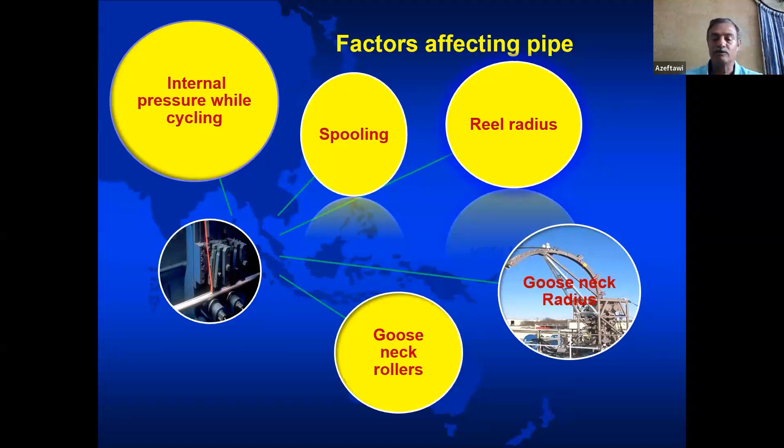In the presentation slides you have, the biggest circle I made is the internal pressure cycling, because this circle combines two main killers: the internal pressure and the bending stress. We talked about spooling, it's a bending stress. We talked about reel radius, which is a bending stress. We talked about the gooseneck radius, which is a bending stress. We talked about the gooseneck rollers.

Then we have these slides, still talking about pipe life. We talked about the rig up alignment. We talked about corrosive fluids. We talked about axial stress. We talked about the traction pressure.

I will just remind you of the traction pressure. This is your pipe that you are running in the hole. Then you have the injector, which holds and injects the pipe in the well and out of the well as well. So these chains grip on the pipe, and if this pressure you have on the pipe is too much, this reduces the pipe life.

Even if it is less than required, it will damage it. Whether it is too much or too little, both will affect the pipe, because if it is too much, this will cause fatigue to the pipe with the extra stress and extra force you have on it. And if it is less, the pipe will start slipping due to its weight inside the well, or the pipe will start to eject out of the well due to the pressure pushing it out. This will create friction between the pipe and the gripper block of the chain that will cause damage to the pipe itself. So the traction pressure is an important factor.

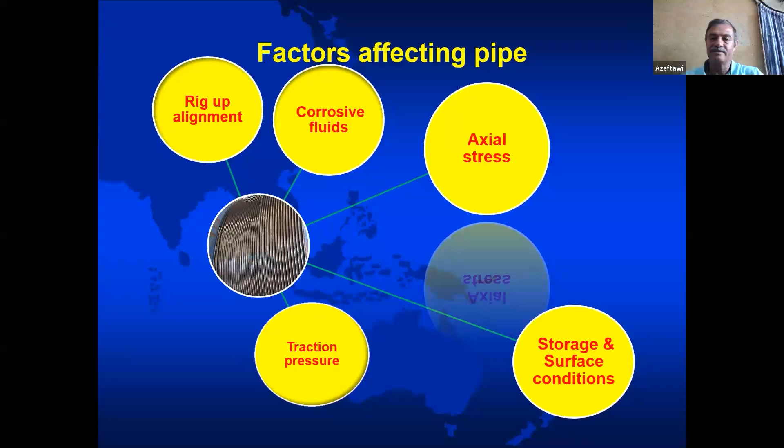and someone else who protects his pipe against all these conditions. Just very simply, have a paint brush with heavy oil, like gear oil, for example, and paint all around the pipe with this oil to make a very thin layer that protects the pipe outside diameter from the surroundings. And someone who is more advanced, who cares more about the pipe, covers it with a tarpaulin to protect it. Of course, this affects the pipe life.

Today let us continue about the factors affecting the pipe life. One of them is the injector gripper block. What you see here in this picture is the chain, and these are the gripper blocks. This profile you see on the gripper block represents the pipe.

So this gripper block, for example, if it is designed to withstand or hold a 2-inch pipe, this profile is made to accommodate 2-inch pipe. If you change the pipe size, you have to change your gripper block to match the new pipe size. So if an injector gripper block does not match the size—for example, you are using a gripper block for 1.5-inch pipe but using a 2-inch coiled tubing pipe—you will damage your pipe; it will collapse.

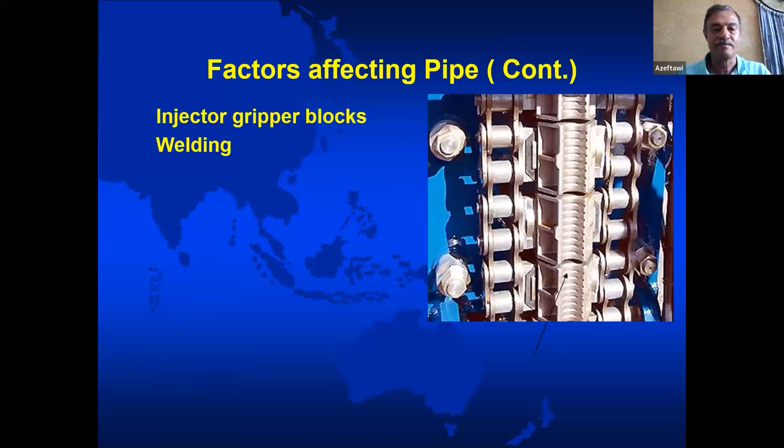Or even if it is the right size, but the gripper block is rusty or one of its teeth is broken, this will definitely affect your pipe life. The welding: the pipe, if for example you got 15,000 feet of pipe from the factory, this pipe comes without any welding.

I wonder if you can see what's inside the pipe or not. But look at my finger here. You see a seam weld here. There is a seam weld here. I wonder if you can see it. I think you can see it now. This is what we call a seam weld.

This is a longitudinal weld, because to manufacture 15,000 feet of pipe, in the past, last century, we used to get strips from the factory. These strips were maybe 2,500 feet. Then we start making it into a pipe. It passes through rollers to make a pipe 2,500 feet long. But you need 15,000 feet, so I have to weld another 2,500, and another. Each weld we do, we call it a butt weld.

The butt weld is a very weak weld, because when you weld two pipes together like that, this area between the two pipes, around the weld, you cause what we call a heat affected zone. In this heat affected zone, the cross-sectional area of the pipe is weakened. And it is true that in the last century, when pulling out of the hole, when this butt weld came across the gooseneck, it would break, because this is a weak point. It does not resist the bending stress, the cycle of straight to bend, does not resist this. That's why, starting from the 80s of last century,

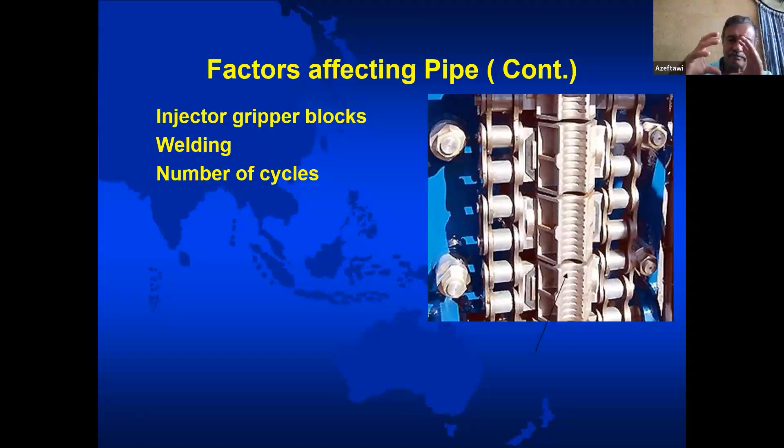Number of cycles. Because as you keep running in hole, pulling out, running in hole, pulling out, passing through the gooseneck, the reel bends and straightens it, then it goes to the gooseneck and bends it again, then it goes to the injector and straightens it. This cycle of straight and bend affects the pipe life dramatically, yes.

The overpull. Because overpull means when you are running in the hole and you get stuck. To get free of the stuck condition, one way is to apply overpull. This overpull you apply is extra axial stress. This extra axial stress affects the tensile strength of the pipe. If the pipe tensile strength is affected, all the mechanical properties of the pipe are affected.

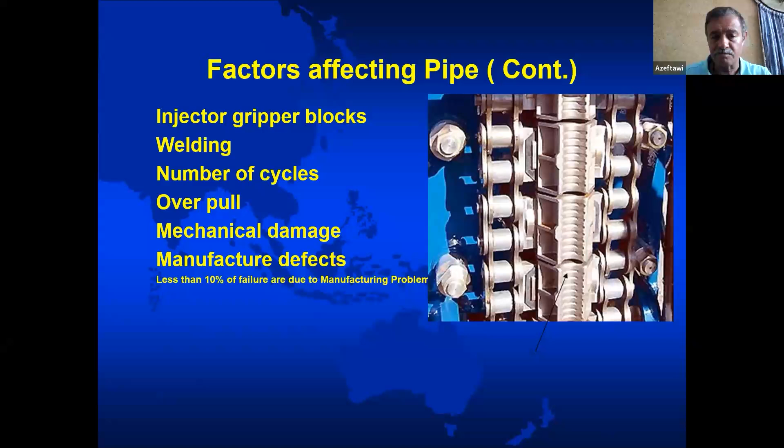Mechanical damage, which is actually the manufacturer's defect. As you see here, less than 10% of failures are due to manufacturer problems. Then comes something really, really dangerous, which I put aside, it is the ovality.

When you buy a pipe from the manufacturer, this is part of a pipe, right? The factory gave you also with this pipe the technical data sheet. This technical data sheet you receive is only valid before you make the first run in hole. Please don't treat it seriously, I mean the technical data sheet.

Because forget it, it is not the same. Once the pipe is out, this pipe you received out of the hole, it is not the pipe you ran the first time. Why am I saying this? The technical data sheet you received from the manufacturer is based on the fact that the pipe you received has one diameter. So if you measure it anywhere, if this is 1.5 inch, it will give you 1.5 inch anywhere you measure. But after you make the first run, the pipe is not round.

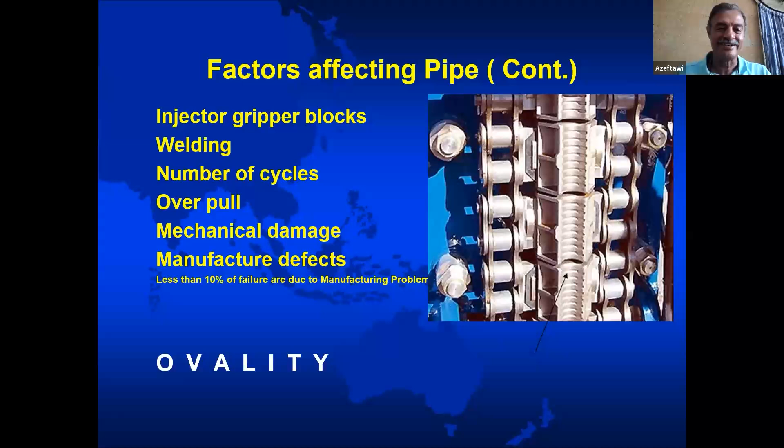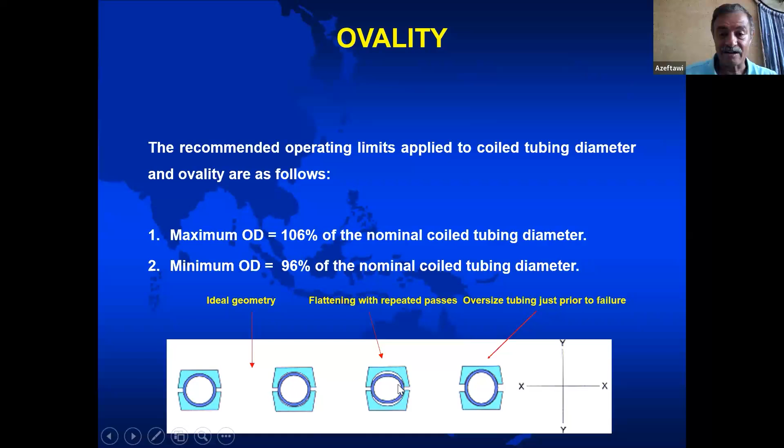Without going into details here, this is the pipe, this is round here. These are the gripper blocks that bite or that grab on the pipe. But look here, the ovality starts to be clear here.

I might go quickly here. When we are running in the hole, if the well is vertical, we have no problem. But if the well is highly deviated, or if we start getting into the horizontal section deep in the well, a lot of considerations has to be taken to tell us how deep we can go into the horizontal section.

Otherwise, when you start going into the horizontal section, now you are pushing the pipe. It is not a weight now, the pipe or the injecting force, but you have to have extra force to push it into the horizontal section. If you have this force to push it, and if the pipe is not pushed, then you will start to have this buckling. And this buckling might increase to a limit that you will be completely stopped.

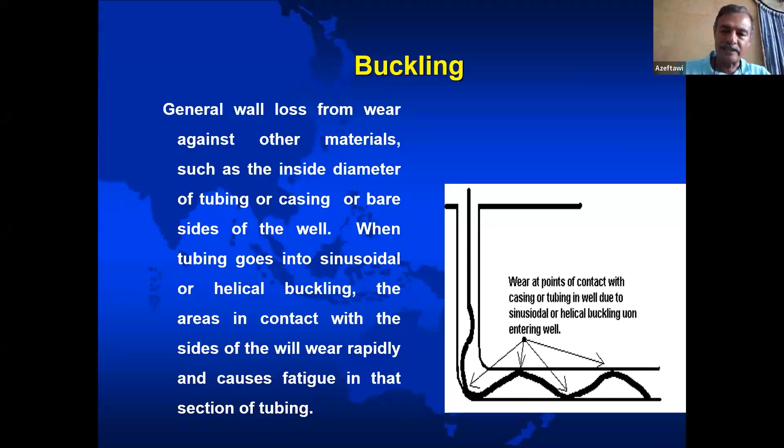Again, without going into details, for this pipe to be pushed into the horizontal section, you need a lot of things to think about and to calculate. But when we talk about the pipe itself, I care about two main things actually: the OD and the thickness. Because the OD and thickness will give me the rigidity, which is what I need to push the pipe into the horizontal section.

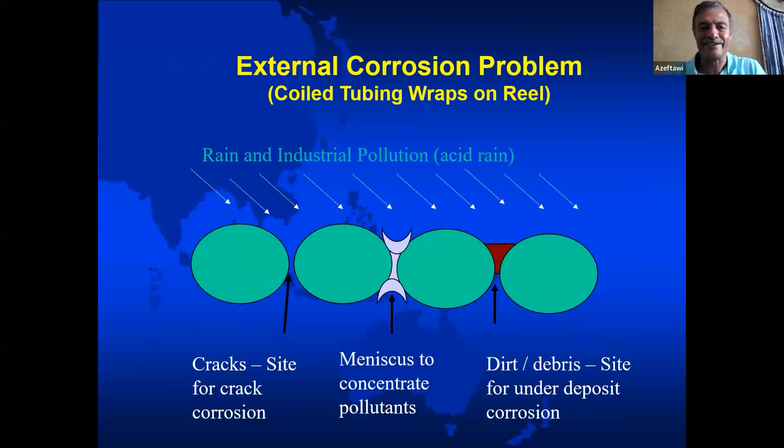We discuss all this in a course of 5 days. Each day is eight hours to talk about coiled tubing only. That's why I cannot talk about this stuff here in a 1 hour session.

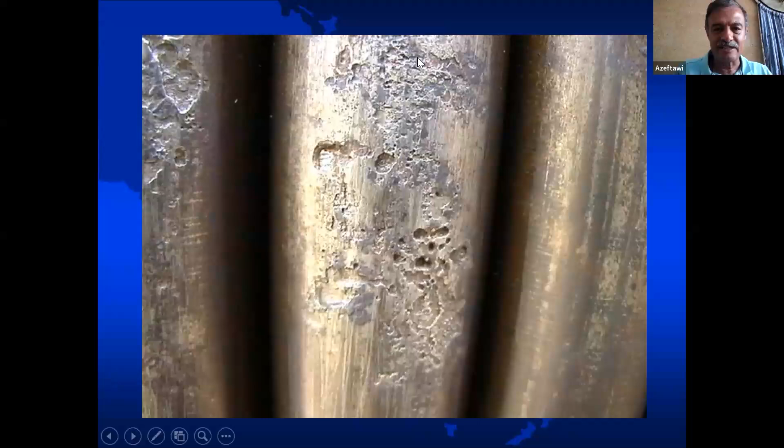You see this damage. This is due to external conditions. H2S, for example.

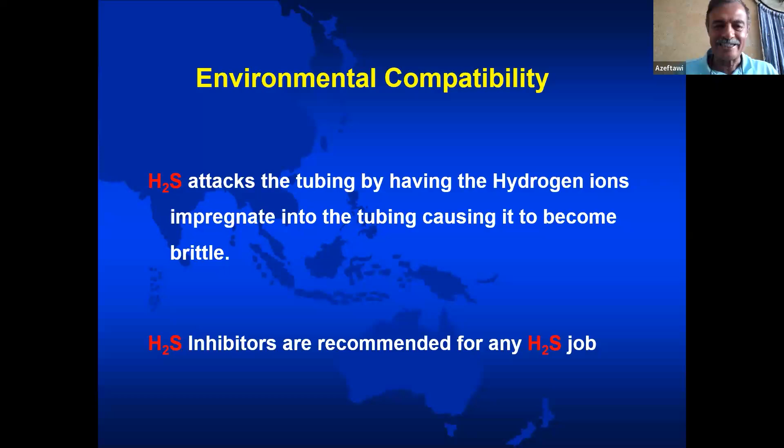H2S - if you work in an H2S environment, that means that all your equipment should be H2S resistant. And I need you to know that if I tell you this pipe is H2S resistant, do not ever think that if you submerge it in a bottle filled with H2S and you keep it there for a month, you will come back and still see the pipe. Of course not. It is H2S resistant up to a limit. You should not exceed it. Otherwise it will not resist. But again, this is a big subject not to talk about here.

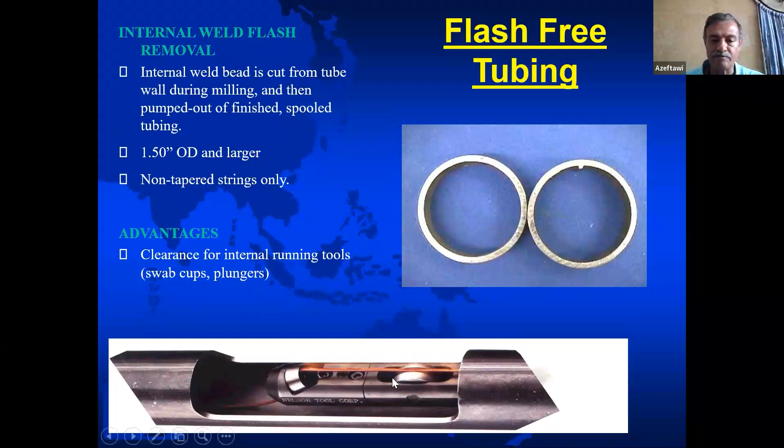See, this is the seam weld I told you about. When we weld the pipe, this longitudinal weld, the seam weld, we call it the flash. This is extra material that we need to remove. The only way to remove it is with this type of pig that we run internally to remove this flash, because it is a weak point.

I need you to know that the coiled tubing is not made of one material. It is made of an alloy between 8 and maybe 12, 13 different materials. It depends on the application. And why do we have it as an alloy? Because we need different advantages that we cannot find in one metal. So we take the advantage from that one, and the advantage from the second one, from the third one. But of course, any advantage you take,

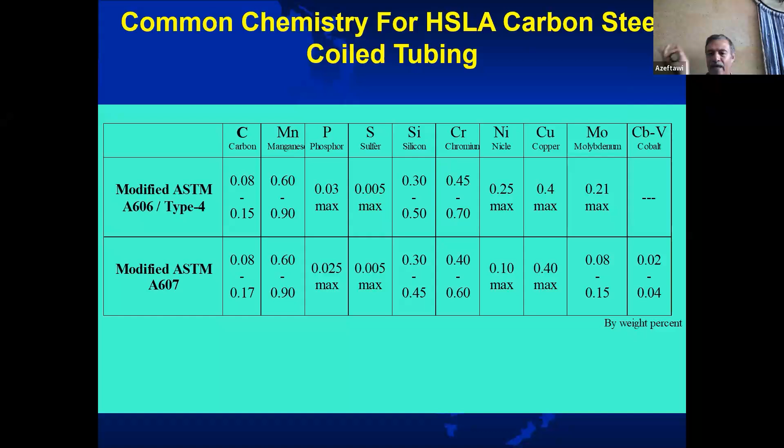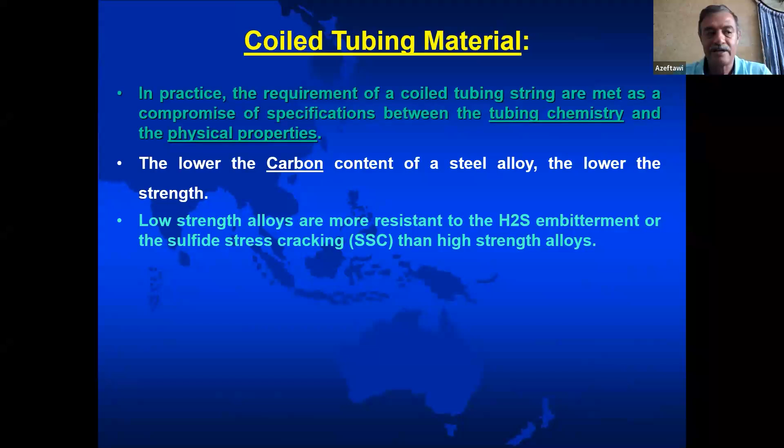you cannot take it alone. You take it with the disadvantage of that metal. That's why, for example, the lower the carbon content of a steel, the lower the strength of the pipe. But the low strength alloys are more resistant to H2S. So you remove the carbon content, you increase the resistance to H2S, but you lose the strength. So it is a combination. You have to know what do you really need.

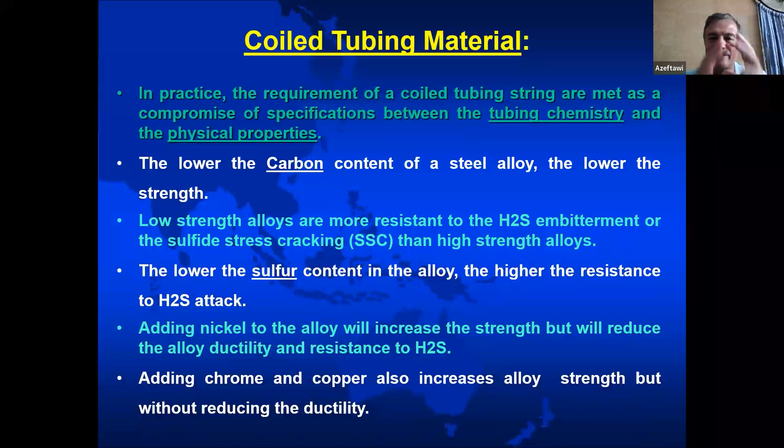The lower the sulfur content in the alloy, for example, the higher the resistance to H2S attack. But adding nickel to the alloy will increase the strength, but will reduce the alloy ductility and resistance to H2S. So you have an advantage, but again, you take it with a disadvantage. So it is quite hard to make this combination that fits the job you need.

I believe everyone of us knows this relation, the stress-strain relation. So I will just skip it.

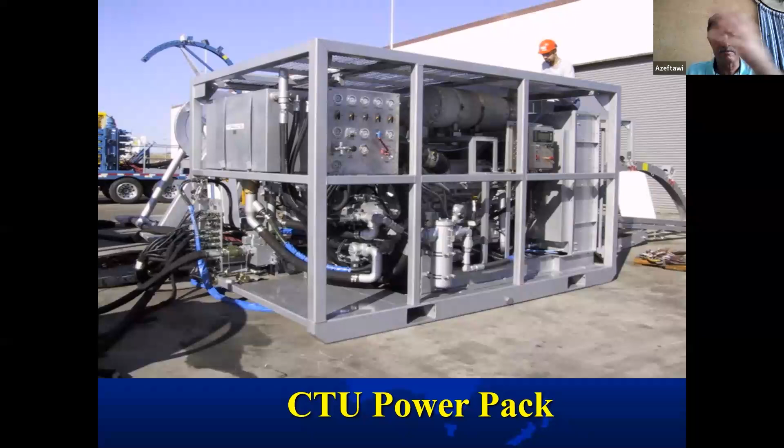If I look at the other side of this power pack to see what the picture looks like, you will see these cylinders. We call these cylinders accumulators. What's the accumulator? It is a steel cylinder like you see. What's inside it?

Inside it, there is a rubber bladder on the top side, where we fill it with pressurized nitrogen at 1500 psi. The rest of the cylinder is hydraulic oil at 1500 psi.

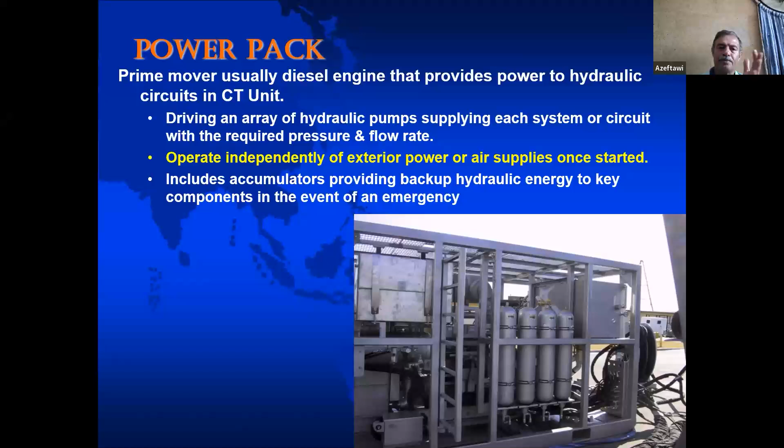If during the job the power pack failed, now you are in a problem, right? Because you lost the power, and accordingly you lost the control. So you might have a disaster, you might have a blowout. That's why we have this backup. If you lost the power pack, as long as it runs, it feeds this accumulator hydraulic oil, which is inside with 1500 psi.

The moment the power pack fails, the pressure will drop. If the pressure drops, the nitrogen, which is at 1500 psi, will expand. It's gas, because the nitrogen is 1500 but the hydraulic oil is less. So pressure will start going from higher to lower, and this bladder will expand, pushing the hydraulic oil into the desired hydraulic hoses required to give you pressure.

This allows you to operate your pressure control equipment, so you can open and close your BOP to secure the well. You can increase the pressure to the injector to keep gripping on the pipe. Because if you are supplying these chains with 1000 psi, for example, and the pressure drops, then the pipe might go into the well under its own weight, because its weight will be greater than the pressure you apply. Or, as we said before, the well pressure might push this up, because the well pressure will be greater than the pressure of the chain at that time.

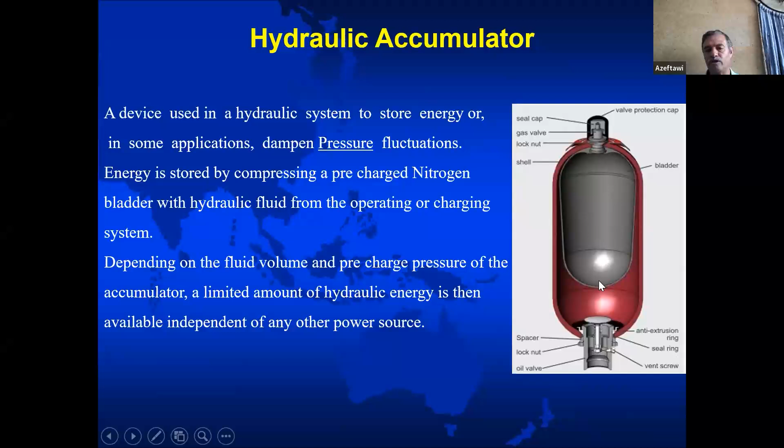So it is a storage of energy. These accumulators store energy to save your life in case of emergency, if you lose the hydraulic power. As I said, this is a picture of the accumulator. This black part is the bladder. Inside it is pressurized nitrogen gas that expands to fill the majority of the accumulator, pushing the hydraulic oil to the required hoses.

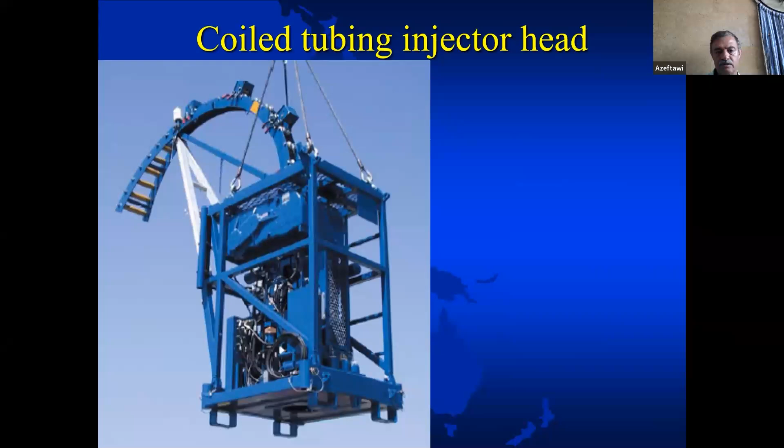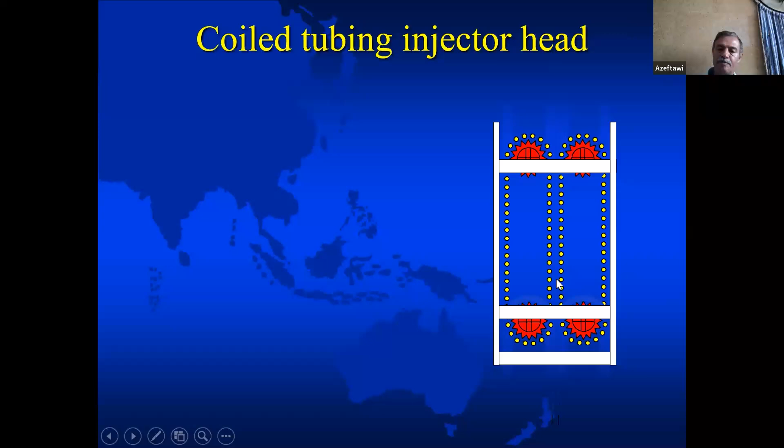These dotted yellow strips are the injector chains, where the pipe goes inside, between them, where we apply pressure. We apply pressure through these traction pressure pistons and cylinders, which are attached to these steel skates. So we push these skates to push the injector chain to grip on the pipe. This is what we call the traction pressure.

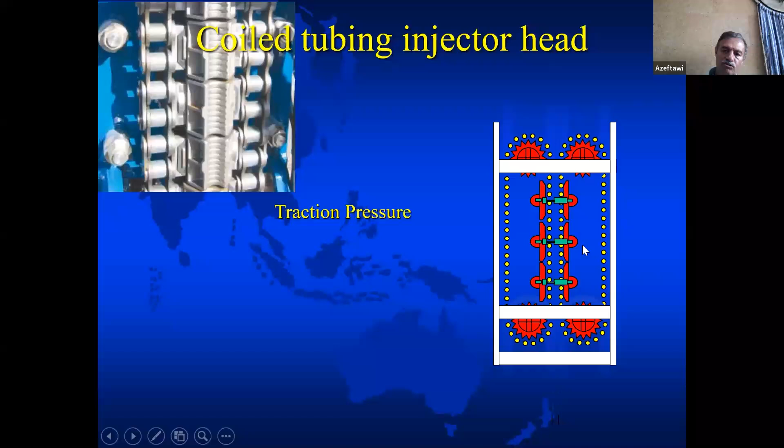And if you look at the other side, these chains here, we cannot leave this long distance uncontrolled, otherwise it will be loose and might buckle. So what we have there is the outside chain tension. We always keep 300 psi on this outside chain tension so these chains are not buckled. This pressure applied to the outside chain tension has nothing to do with the pipe itself, but is for the chain to avoid buckling.

Here is our pipe, and let's start now running in the hole. We are running in the hole now. These chains are pushing the pipe down, controlled by constantly grabbing on the pipe. If we need to pull out of the hole, all we have to do is change the cycle. The inside becomes outside, the outside becomes inside, and now we are pulling out of the hole.

Let us put everything back. This is our injector. And below here, as I told you, what's attached to the bottom is the stuffing box, which is our primary valve.

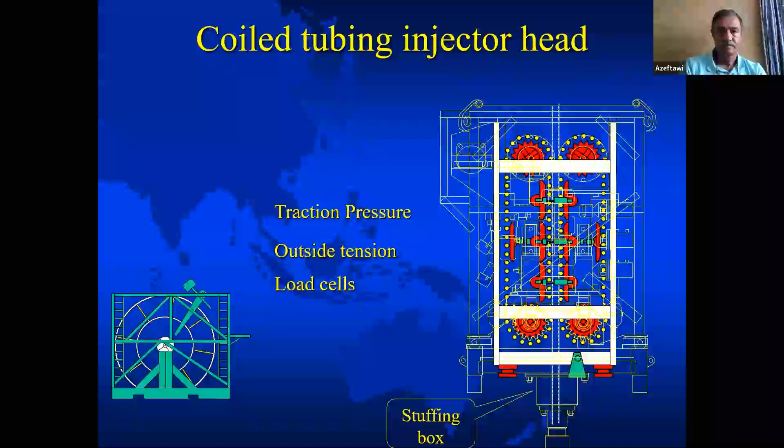This is a cross-sectional area of the injector. We cut here to see what's inside. This is the driver sprocket, this is the idle sprocket. These green parts are the skates, which are attached to the piston and cylinders where we apply the traction pressure to grip on the pipe. And you see the pipe, the white pipe here. And this yellow sprocket is where we apply the chain tension, the outside chain tension, to keep this distance from being buckled.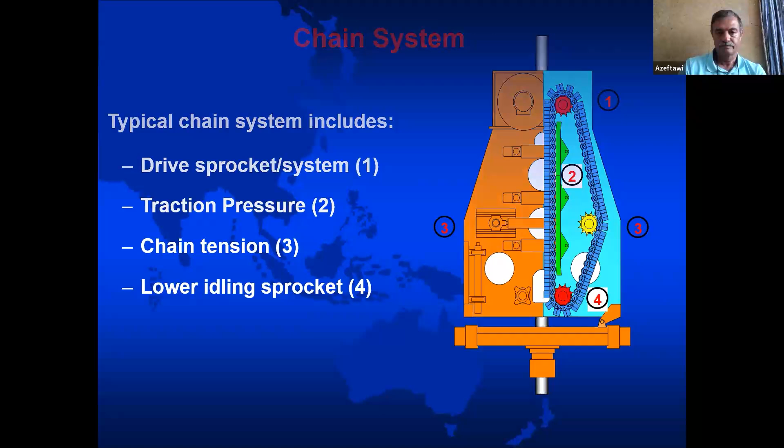Now we are running in the hole, and this is another picture of what we have here. These are piston and cylinder, where we control it from the control cabin. When we apply pressure this side, this is to grip on the pipe.

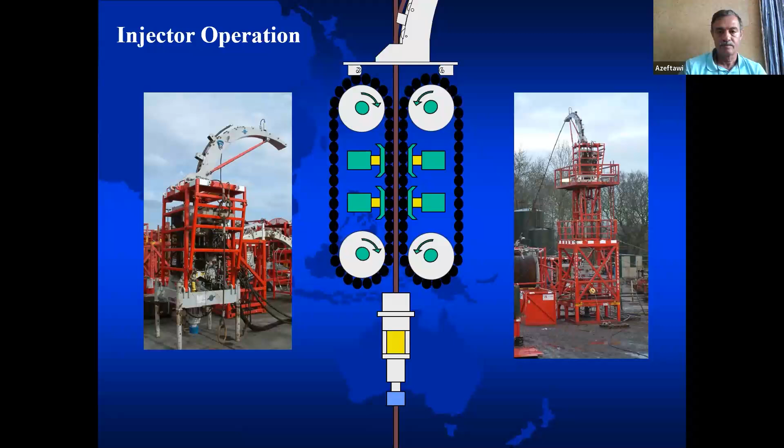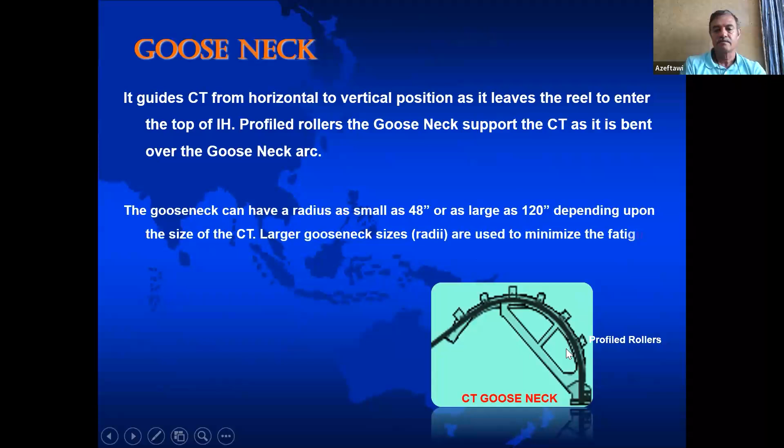This is the gooseneck. If you remember, we said when we increase the pipe size, we have to increase the gooseneck radius to minimize the bending stress. What you will see now are different sizes of gooseneck. The bigger size is for bigger diameter, the smaller size is for smaller diameter.

This is our injector, this is our gooseneck, and this is our primary barrier, which is the stuffing box. These are the hydraulic hoses, which are connected to the control cabin, where I can control the movement of the injector, whether I'm running in the hole, pulling out of the hole, increasing the pressure on the skates, or decreasing the pressure.

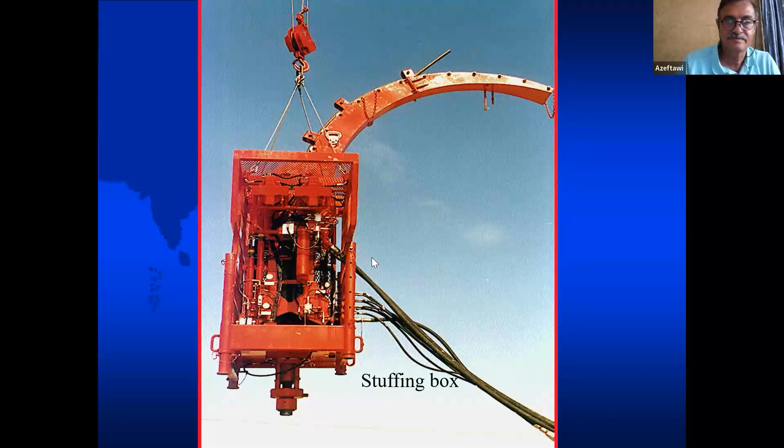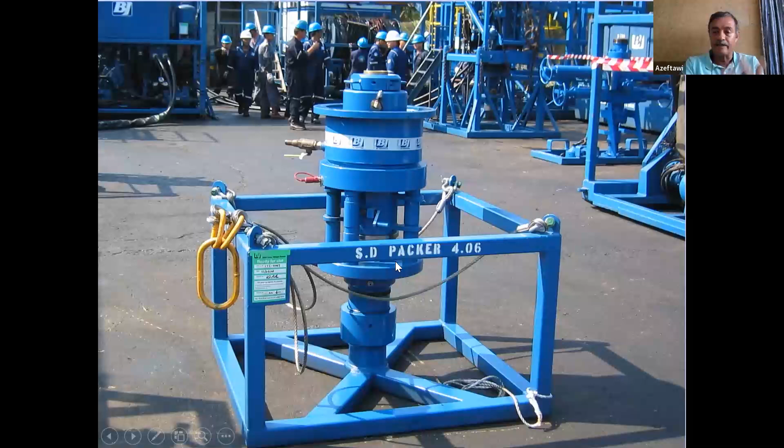This is the stuffing box. If you look what's written here in white, SD Packer 4.06. This means this is a side door packer, a side door stuffing box, side door element. And 406 is the size of this stuffing box, 4 1/16 of an inch. We call it side door because of this door on the side, where inside it is the element, the rubber element that seals around the pipe.

So if you need to change this element during the job because it is damaged, you can easily do that by opening this side door, taking the bad element out, putting the new element, closing the door, closing the lock, and applying pressure. In 5 minutes, you change the rubber element.

This is our primary barrier. It works by pressure. These are made of polymers. It is self-lubricating, so you don't have to apply any grease or oil while running in the hole or pulling out of the hole, because these are self-lubricant.

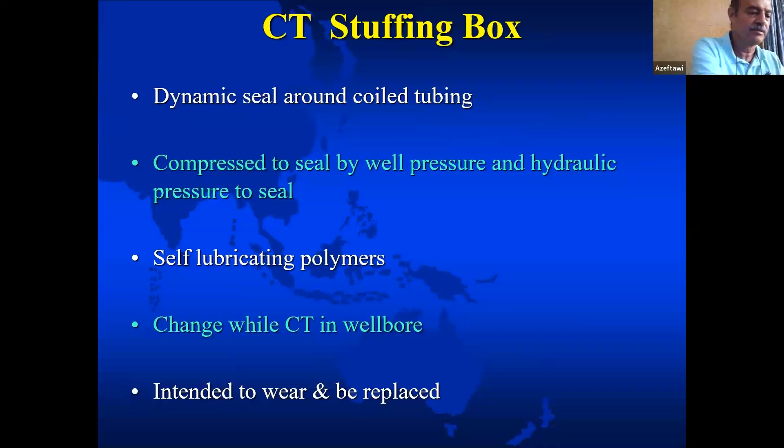From time to time, of course, it leaks, because there is friction between the pipe and the polymers. So it leaks, but then from the control cabin, you can apply pressure to seal again.

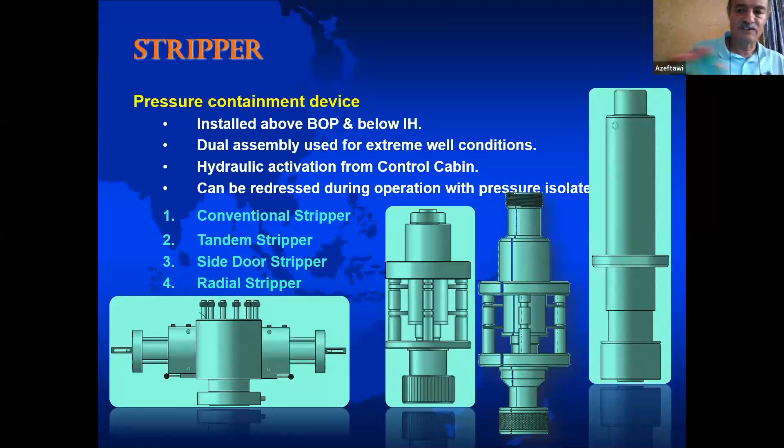I have seen people in the field during the job, if the stripper, these polymers, leak, they increase the pressure. But the way they increase the pressure is really funny. People don't realize that all you need is to apply 10 psi, 15 psi, and this is sufficient to make the seal again. But people just, whatever they get, 100 or 500, they don't care. This is really bad, because the extra pressure you apply causes extra friction between this polymer and the seal, so you are damaging your sealing surface rapidly.

The size of this stripper depends on the bore. We have different sizes, dressed for a specific size of coil tubing, of course. It is hydraulic, it works by hydraulic, and we have 5,000, 10,000, 15,000 psi, depending on your requirement. Some of them are H2S resistant. This is a specific requirement you have to mention, because this is extra money.

Now we have different materials. Normally, people, when they go to the job, they just grab this from the store and go. Normally, what we have in the store is the cheapest one. If you're looking for a can of sugar, then you go to the supermarket. Many people select the cheapest, as long as it is the same size and it looks white. So you select it. If you have one pack at $1 and one pack at $0.75, of course you will go for the $0.75.

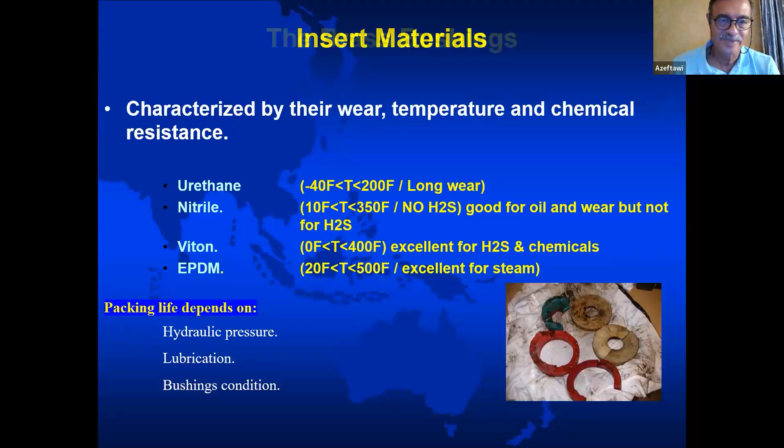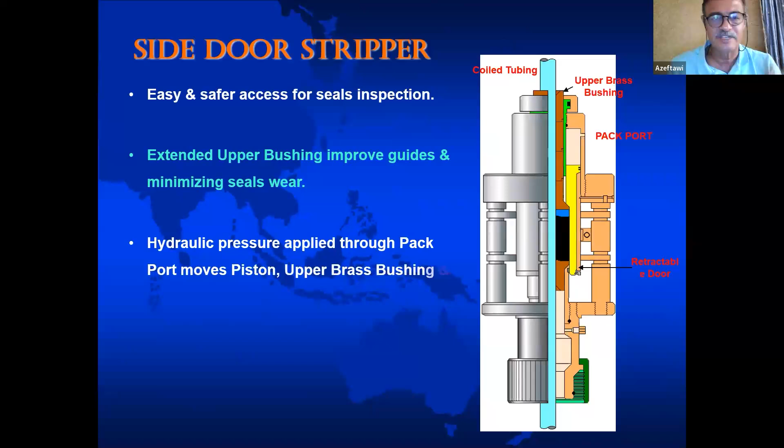I cannot go to, I will skip these pictures because of the nature of this course.

This is our control cabin. This is how it looks inside, from inside. This is what you're going to see. You have controls - you can control everything in the unit. You can control the power pack, your BOPs, your injectors, everything from these knobs here.

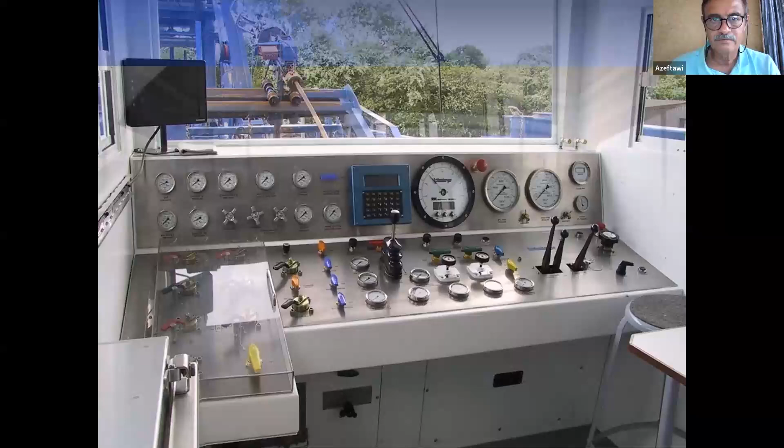I always prefer this type of control cabin or control house, because you see the whole view, so you can see all around you. We have some of these now. All the controls are on your seat - when you are sitting there, everything is on the side of the seats.

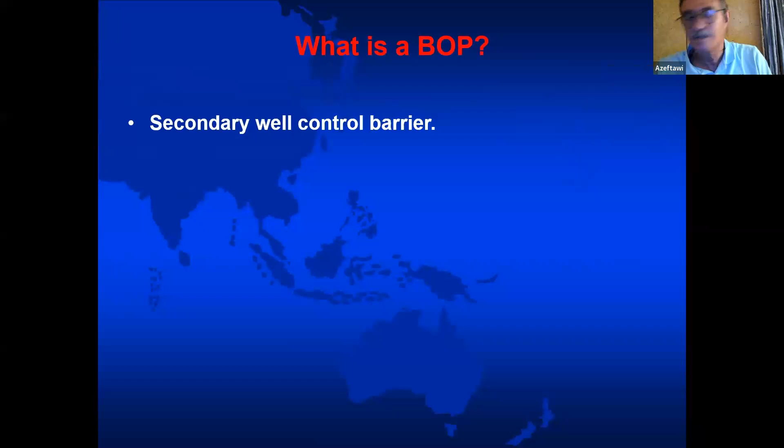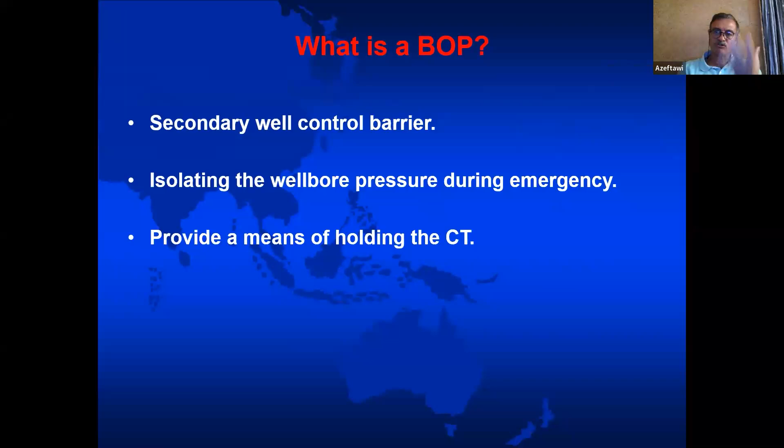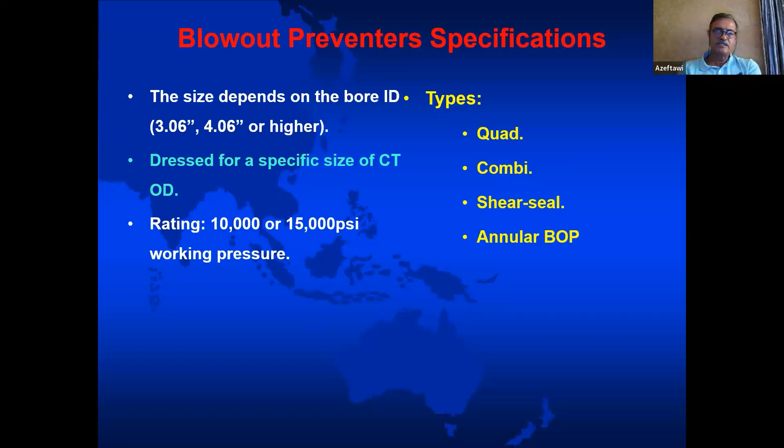Then we have our secondary barrier, which is the BOP, blowout preventer. This is our secondary barrier control, isolating the well pressure during emergency. It provides means of holding the coiled tubing. It can hold the whole weight of the pipe. Different types of BOP we have, different sizes, different pressure ratings, different ODs. We have standard service, we have H2S service.

I think I skipped something, just a minute.

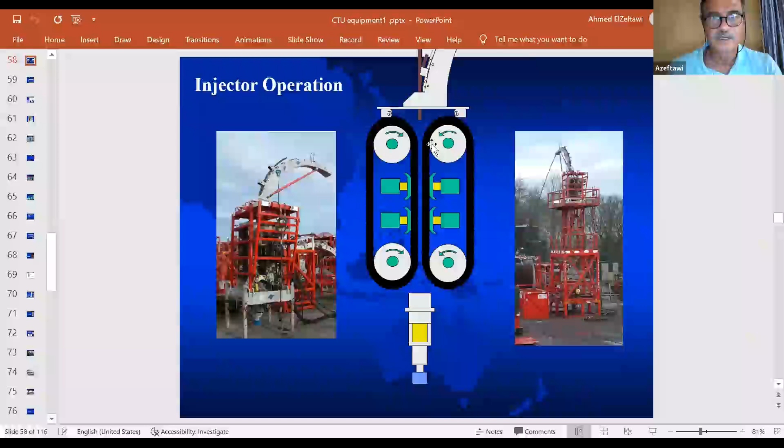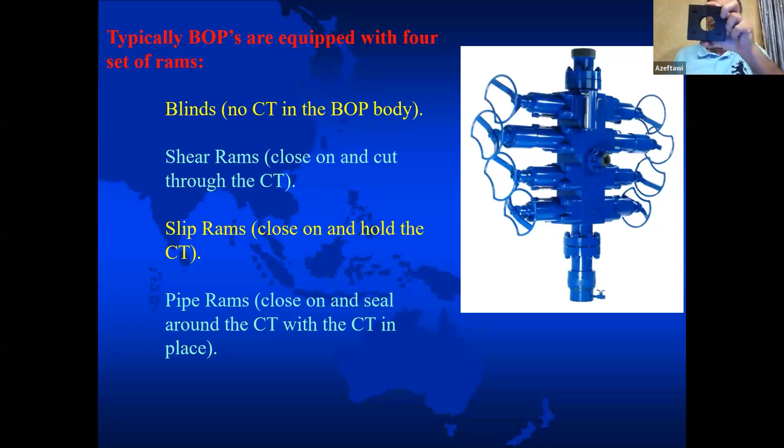The last one is the pipe ram. This is the pipe ram, and this is the pipe, the inner insert. I will drag it here. I have 2 of them. So when I close - this is the second one - when I close, it will seal around the pipe here. This is the pipe ram, which is the last one.

I'm looking for the question, please.

Please tell again why there are teeth in the slip ram. Teeth are required to hold this pipe. If there is no teeth here, it will be very smooth, there is no friction, so there is no gripping. But by having this teeth, it will bite on the pipe and grip on it correctly.

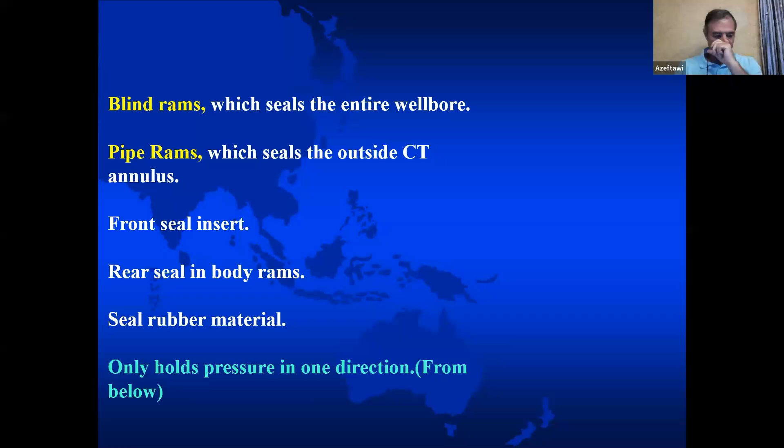Before looking at the question, I was telling you that if you go to the rig floor to see the slips, which we normally use while running completion or drill pipe to hold the weight of the pipe, you'll see the teeth of the slips on the rig floor are facing upward. It faces upward so it will resist the weight.

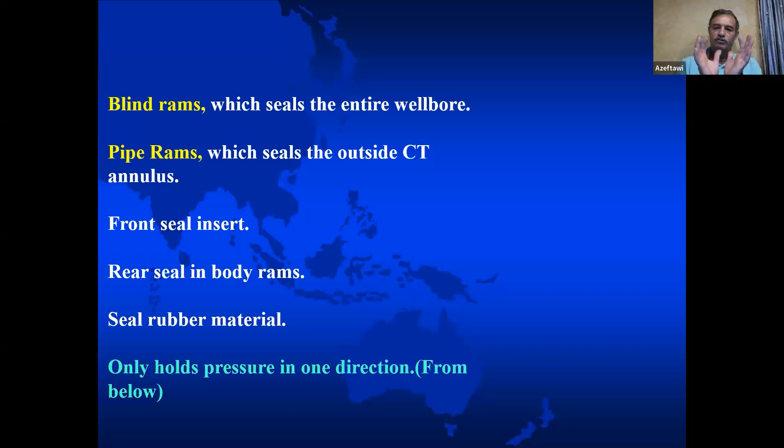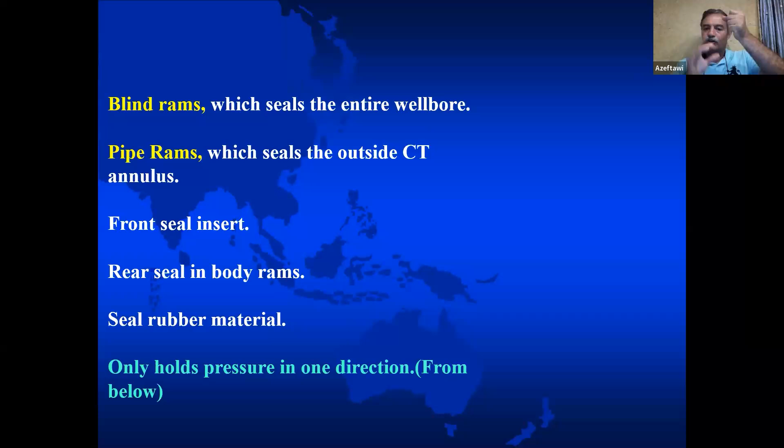But if you look at these teeth, it does not face upward or downward. It is straight, because this is the way we need it. In coiled tubing, when we apply the slip ram, it will hold the pressure, hold the pipe, preventing the weight of the pipe, and also withstand upward force coming from the well pressure pushing this pipe out. So the slips with normal teeth will hold two forces: the force coming from below, which is the well pressure pushing up, and the force coming from the weight itself trying to push it down.

I have a question. What topic did we start today, a lecture from? It is coiled tubing.

Can you please go again with the blind ram insert? Sure, I can go again with the blind ram insert. Do all 4 rams apply at the same time? No, one by one. And thanks for answering the question. Do all rams go one by one? No, you apply the ram you need. We will go now explaining this point. But let me go to the other - can you please again, blind ram insert?

This is the blind ram insert. In case of emergency and you need to stop the well flow, what you do is apply pressure to the first actuator, so the blind ram will close. When it closes like that, if you look here, it is rubber against rubber, so this will prevent the well pressure from escaping out of the well.

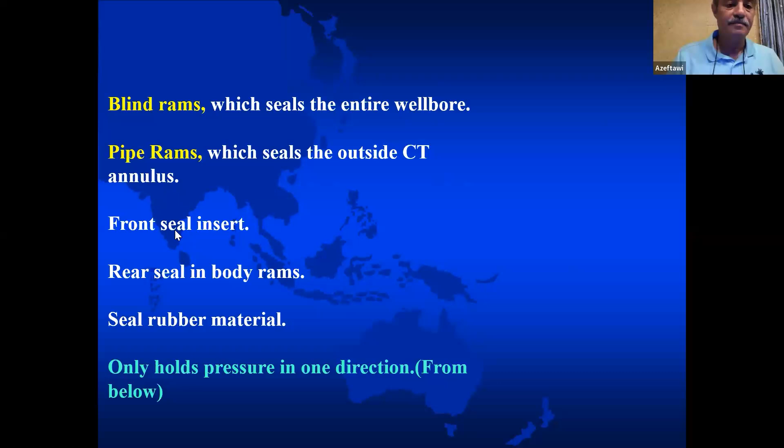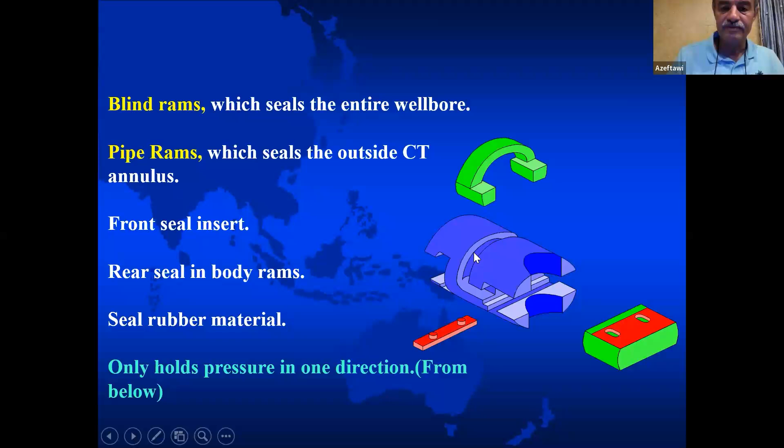This is the blind ram insert. This is the blind ram, this is the ram itself, this is the insert, the blind insert. This is what you see here, this is the pipe ram insert. This is what seals around the pipe based on the specific diameter.

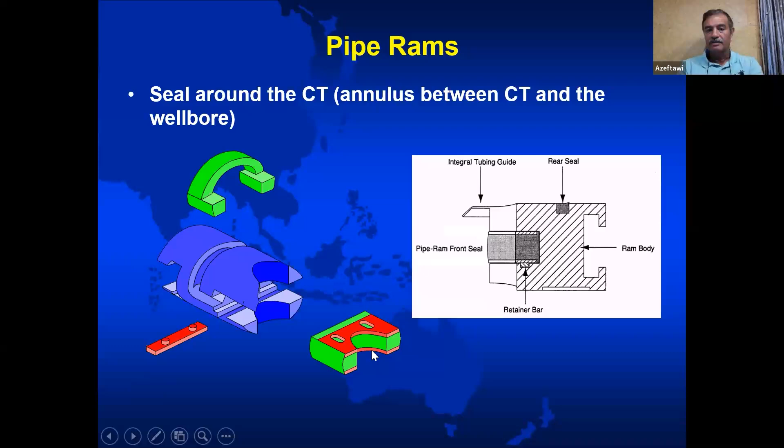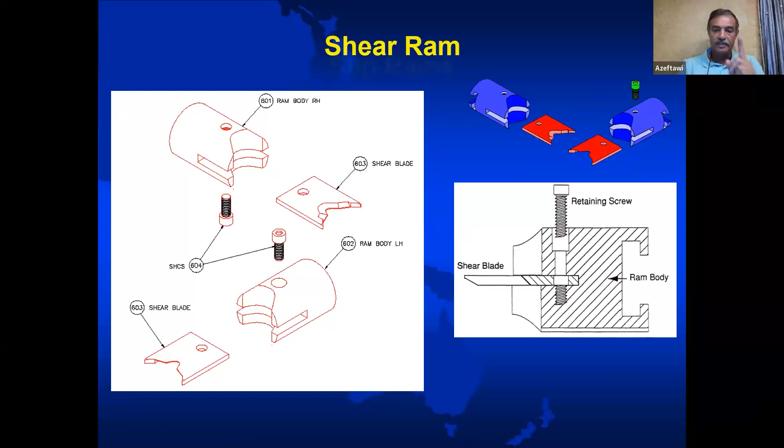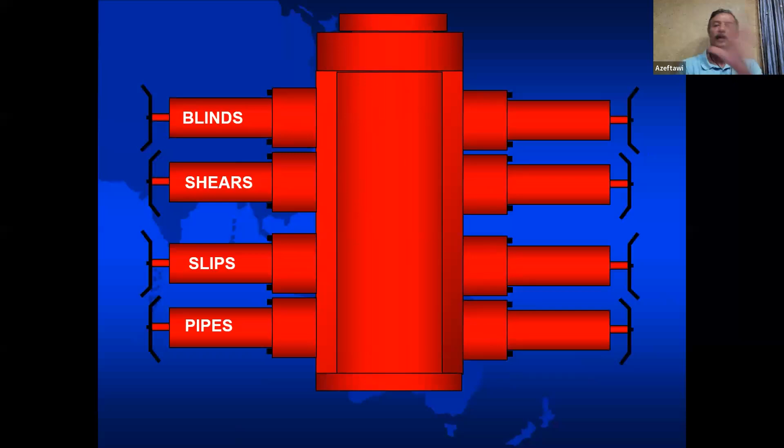Here is another picture of the slips, the slip ram insert. In case of emergency, and we need to secure the well, our primary barrier failed and we have a major incident where we need to cut the pipe and secure the well, we will do 4 steps.

Step number 1 is to close the slip ram. Here is the pipe, this is the pipe inside the well. So we'll apply the slip ram, then the pipe ram. First thing is to close the slip ram, which is number 3 here, then close the pipe ram, which is the last one. So now the pipe is in hand.

When you apply a pipe ram, we secured the seal. Two steps now we made. The third one is to cut using the shear blade. When we cut, then we pull out 1 feet. Why after cutting do we pull out 1 feet? Because if we apply the blind ram, what's in front of us is the pipe, so it will not seal, because this blind ram seals only when there is insert-to-insert contact. If there is pipe, there is no seal.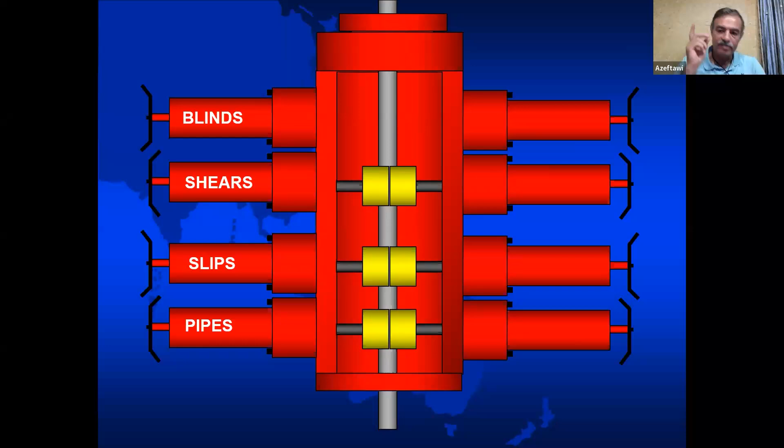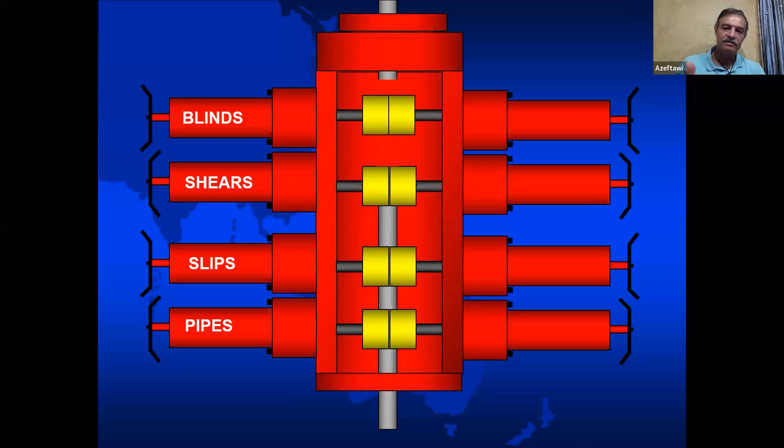So the third step we did is use the shear to cut. The 4th step is to pull out 1 feet. The 5th step is to close the blind ram, so it will seal the well, and you still have the pipe in hand - you don't have to fish it. These are the 5 steps: close the slips, close the pipe, cut the pipe, pull out 1 feet, close the blind. Here are the 5 steps in sequence.

Does anyone know what are the common sizes we have of the pipe? Is it 1 inch? Is it 2 inches? Is it 6 inch? Is it 18 inch? What is the common OD of the pipe we are using? Of course, we have different sizes. Do you know the average size?

A question I have: will I be correct to say we only activate the blind ram when coil is out of the well? Of course, you cannot activate it while pipe is in. The only way to use it is when the pipe is out.

Pressure should be equalized for closing ram, and what happens if shear ram fails? No, you should equalize when you open the ram, because when you close, pressure above and below it is the same still. But when you close and bleed off the pressure to work on whatever device you have, to open it now you cannot, because pressure above it is 0, pressure below it is 3,000. So you have to equalize when you open, not when you close.

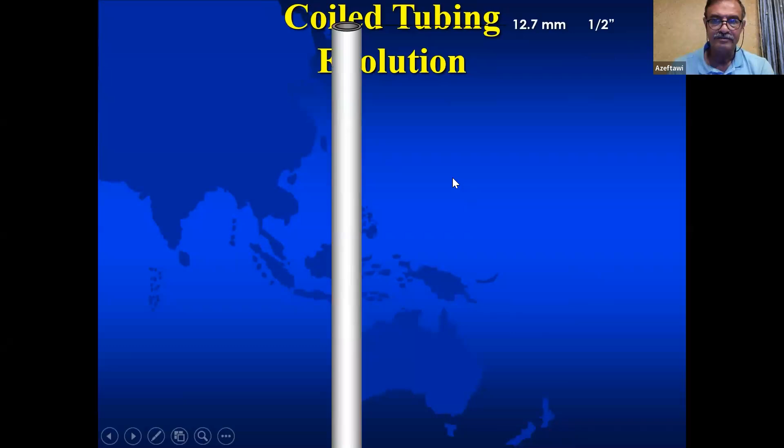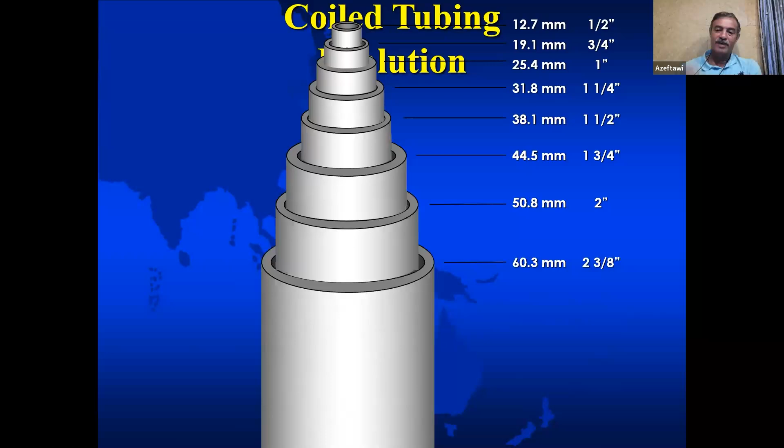Okay, let's start with the sizes we have. We have 1/2 inch, 3/4, then 1 inch, then 1 1/4, then 1 1/2 inch, then 1 3/4, then 2 inch size OD, then 2 3/8, and 2 7/8, and 3 1/2 inch, and 4 1/2 inch, and 6 1/2 inch.

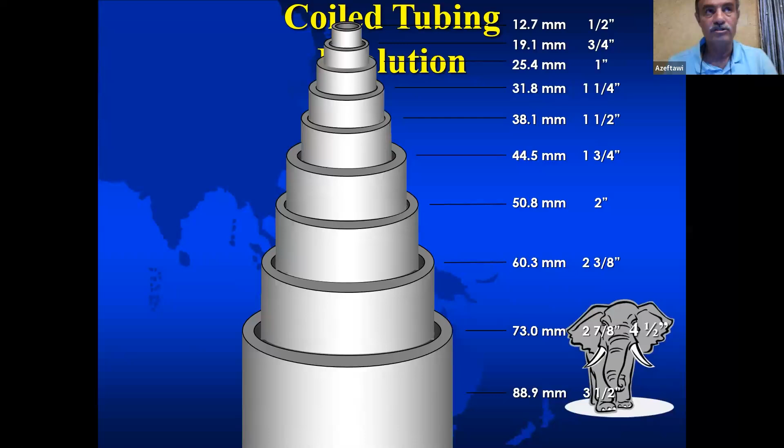These sizes, starting from 3 1/2 onward, we use for another application. We can use coiled tubing as a pipeline, especially underwater pipeline, because it's much faster, easier, cheaper. And we use it for completion.

In Oman, Shell Oman, PDO, Petroleum Development Oman, the oil producer in Oman, was the first company in the Middle East to run coiled tubing as a completion string. That was back in 1993. We use coiled tubing as a completion, and we call it monobore completion.

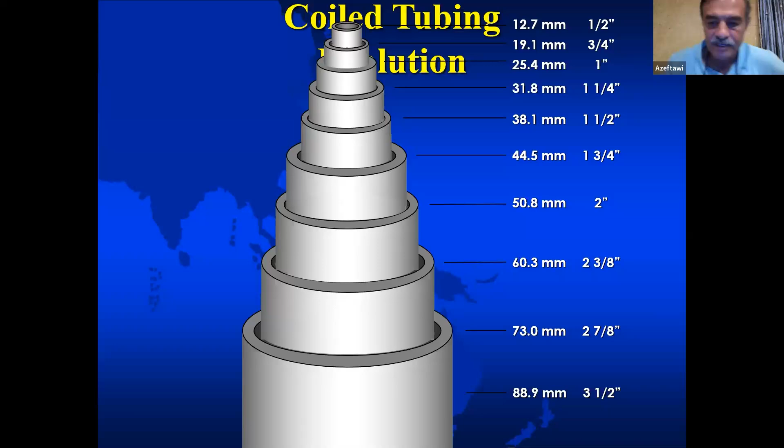And we use these big sizes also for drilling, because we have coiled tubing drilling rigs. We can drill a well with coiled tubing now. That's why we have these big sizes, 3 1/2, 4 1/2, 6 1/2. We have different thicknesses as well.

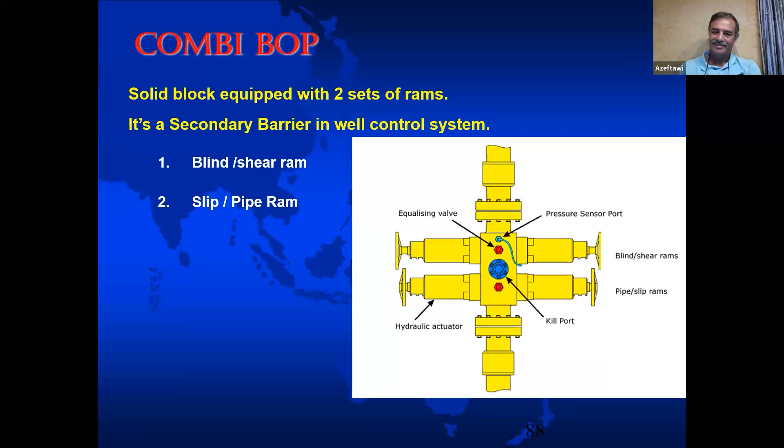What we see in front of us now is not a quad BOP. This is what we call a combi BOP. Combi stands for combination BOP, because the 4 actuators here are only 2, but the 2 do the same function as the 4. The first one on top is blind and shear at the same time. The second one is slip and pipe at the same time. That's why we call it so, but all other components still exist, like equalizing valve, killing port in the middle to kill the well from.

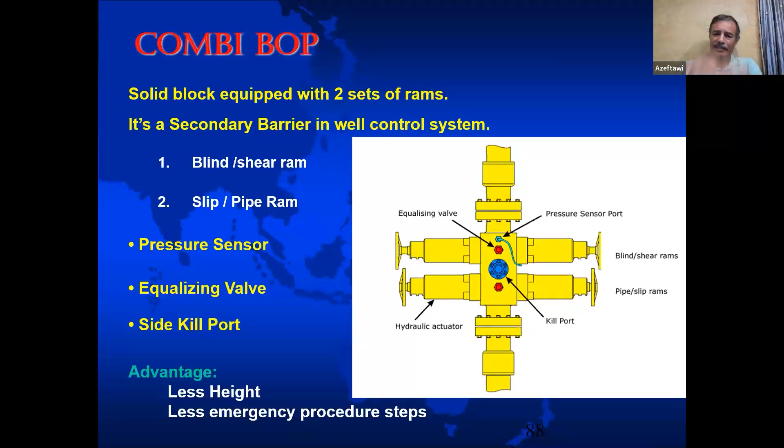But this one is better than the quad actually, because it's shorter, so our rig-up is shorter. Plus, it requires less procedures. In the quad, we have to do 5 steps: close the slips, close the pipe, cut, pull out 1 foot, close the blind — 5 steps. Here it's only 2 steps. First, you close the pipe and slips together. Second step, close shear and blind, shear and seal at the same time. So you minimize the steps.

Our tertiary barrier in coil tubing is not the Christmas tree. It is a shear seal BOP. We call it the safety head. The shear seal BOP is the first thing we put on top of the Christmas tree.

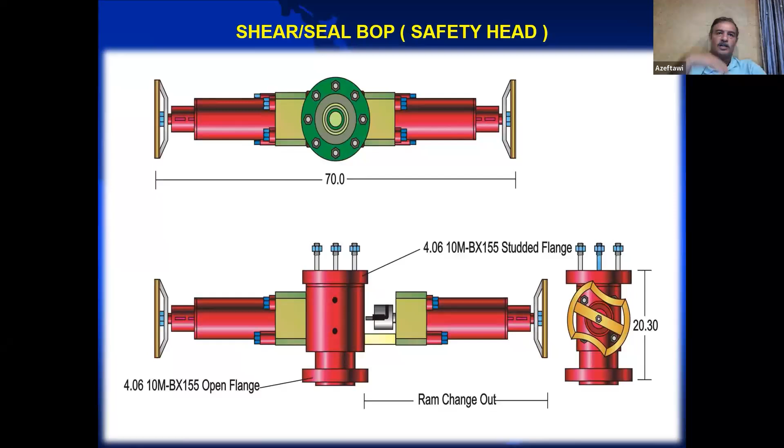This one has to be operated from the control cabin as usual, and from another separate control panel you can put it away from the location, up to 200 feet, as we discussed. So you can secure the well if there is an emergency or a hazard situation where you cannot stay in the location, or you cannot even enter the location.

This is the sequence of how to use shear seal at the same time, to cut the pipe and seal the well at the same time. So if you look at the design here, it's different. These are the cutting blades. So you apply pressure, it cuts the pipe, and you continue your movement. The pipe's lower part will be bent to fill this space. And you continue, and now you seal against these 2 seals. So you cut and seal at the same time.

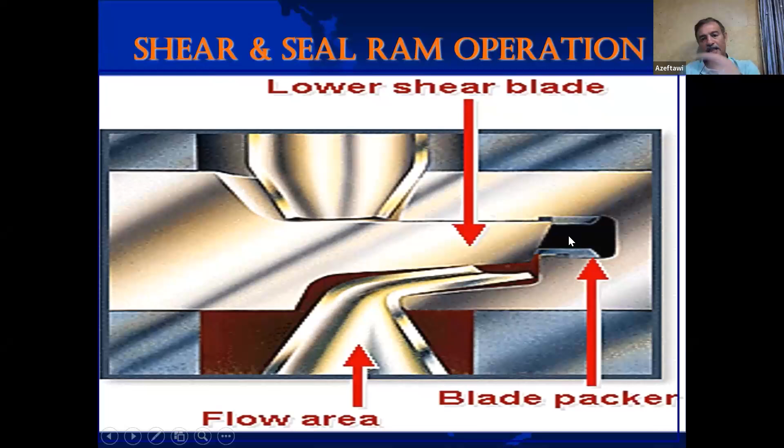With coil tubing, you always have to run a bottom hole assembly with specific tools. It's important to talk about these quickly, and this will be our last topic. But please remember, when we use coil tubing, our primary barrier is the stripper rubber, our secondary barrier is the BOP, and our tertiary barrier is the shear seal. This is common practice.

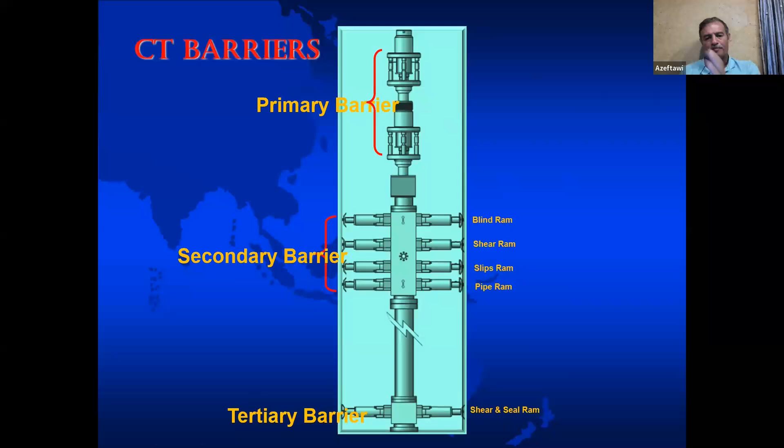When we come to the bottom hole assembly, the first thing we attach to the pipe is the connector. The main reason for a connector is to have a thread, a device so we can connect our tools. Whether it's an internal or external connector is a different story, but at the end, we need a thread.

So to connect with this thread, we put check valves, normally flapper type. This flapper type allows you to apply pressure from above, and it will open. But if you release this pressure, the flapper closes automatically, saving your life in case of emergency. This prevents well pressure from entering your pipe and causing a blowout at the surface if you have a pinhole there.